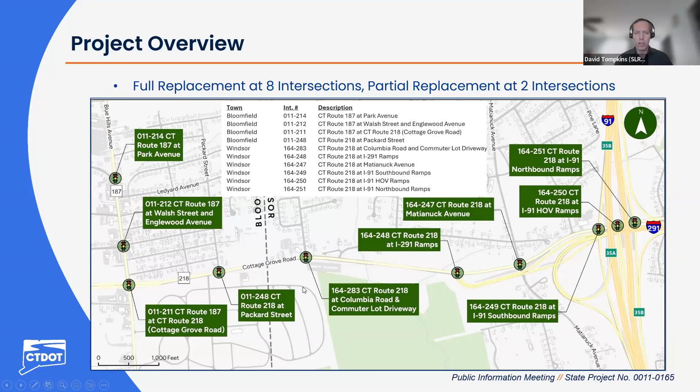The purpose of this project is to replace older infrastructure, which is more expensive and difficult to maintain. When we're done, the traffic signals will all be in good condition, new, and much easier to keep in a state of good repair. We are also going to make improvements to improve the efficiency of travel in this area and make some safety improvements at these intersections.

We're going to include much more push buttons and signals for pedestrians to cross at these intersections. We're going to look into flashing left turn yellow arrow signals, and upgrade by providing new detection and fiber optic communications connecting the intersections. We're also going to coordinate with the needs of the transit stops in the area, make sure sidewalks are in good condition, and increase illumination levels at the crosswalks and transit stops.

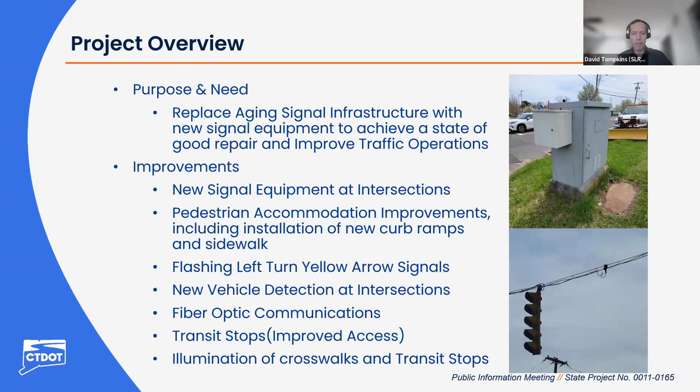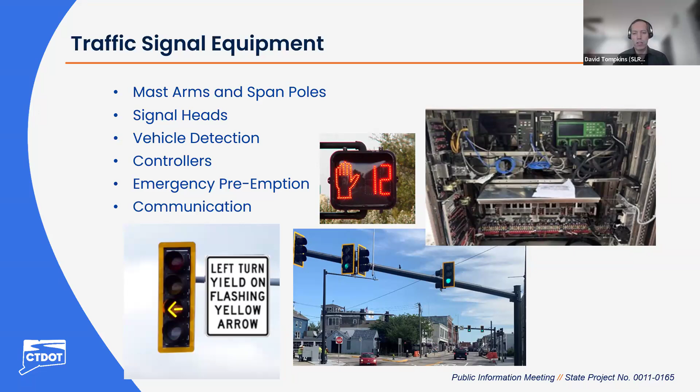So the new equipment will mostly be mast arms, as you see in this bottom center picture, and they will be over the roadway, rigid. It's better for the detection equipment to be rigid there over the roadway, works better. We're also going to look at the signal heads, considering if left turn flashing arrow signal heads were appropriate, and adding pedestrian countdown signals and replacing all the hardware that runs these traffic lights. We'll coordinate with the town on the emergency preemption needs they feel are necessary at these intersections.

For the pedestrians, we're going to upgrade to have new sidewalk ramps and sidewalk connections to the equipment as needed, new push buttons and signal heads with countdown signal timings for the clearance phase. The vehicle movements that will be concurrent with the pedestrian movements is another change. Instead of having pedestrians go when all traffic is stopped, we're moving to the current standard, which is concurrent pedestrian phasing, where traffic going northbound and southbound is going, and pedestrians can cross northbound and southbound at the same time.

To support this concurrent pedestrian phasing, there will be new signs. As you see there, the no turn on red and the turning vehicles yield to pedestrians signs will normally be blank, and then when a pedestrian phase is called, they'll display that indication to warn motorists of the pedestrians crossing.

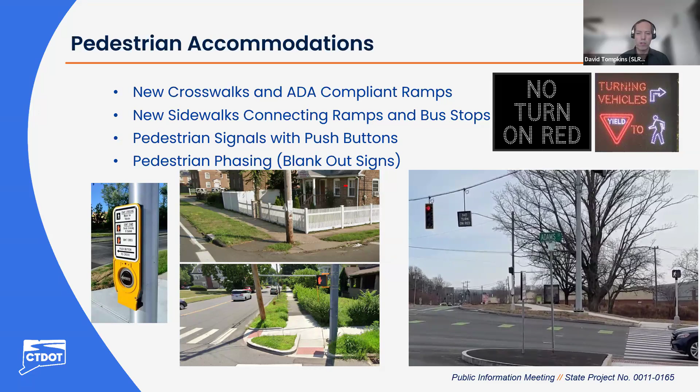I'd like to turn it over to Tom Daley to talk more about the technology here for the detection. Great, thank you, David.

As part of the project, we'll be providing some traffic signal operation improvements. These will include 360-degree bell cameras used for stop bar detection for all the approaches, to detect the presence of vehicles waiting at the stop bar as a trigger to switch the cycle from red to green. Additionally, radar detectors will be introduced for advanced detection of approaching vehicles along Routes 187 and 218. These detect vehicles several hundred feet in advance of the intersection and extend the signal green time to allow the approaching vehicles time to clear the intersection.

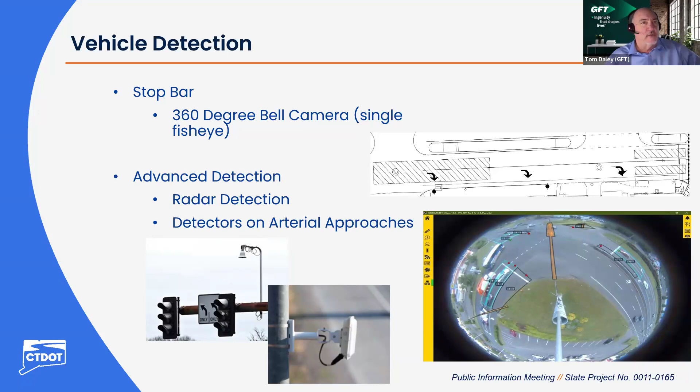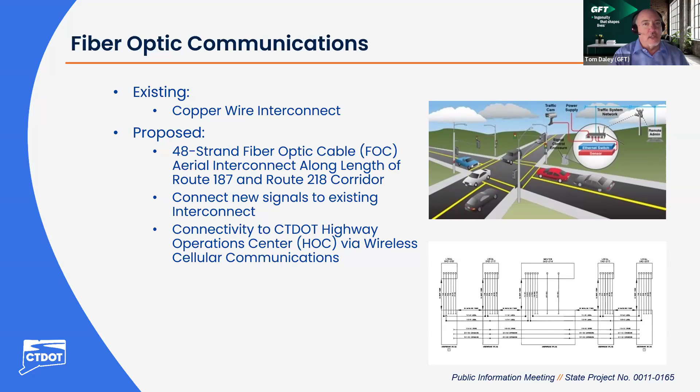To help improve corridor performance and mobility, fiber optic communications will be installed to replace the existing copper wire system. The fiber optic cable will run the entire length of the project corridors and connect to each of the traffic signals, allowing for communications and coordination between intersections. A master signal controller will include a wireless cellular system that communicates to the DOT operations center, allowing for more reliable communications and improving the DOT's ability to respond to operational issues and traffic incidents along the corridor. And with that, I'll turn it back to David.

Thank you, Tom. Now we're going to look at the individual intersections, starting with the northernmost intersection, Route 187 at Park Avenue, intersection 11-214 in Bloomfield. It's a fairly well-traveled Y intersection. You can see from the pictures on the left, a view looking south at the intersection, and the second lower picture looking north on Route 187. In the aerial view, you can see there's a barber shop on the corner and an auto supply store across the street. It currently has two crosswalks.

This is the pedestrian phase where all traffic is stopped and then pedestrians go. This will be upgraded to the new concurrent phasing to increase operations, efficiency, and safety here. We're going to include three crosswalks with replaced sidewalks at the corners to make them ADA compliant, and we'll use mast arm signal supports at this intersection. There will be a small area of right-of-way acquisition for the installation of these mast arms, and the signal heads will all be on the mast arm supports.

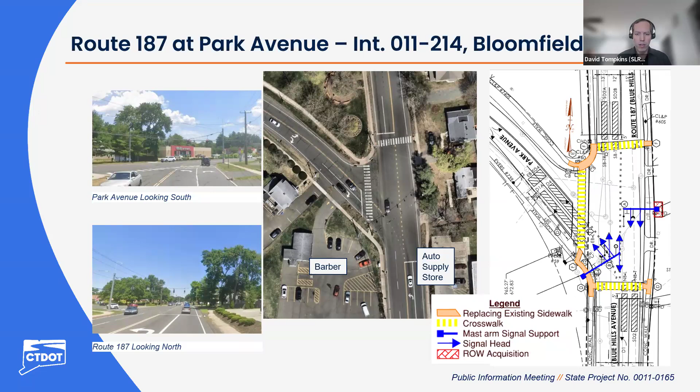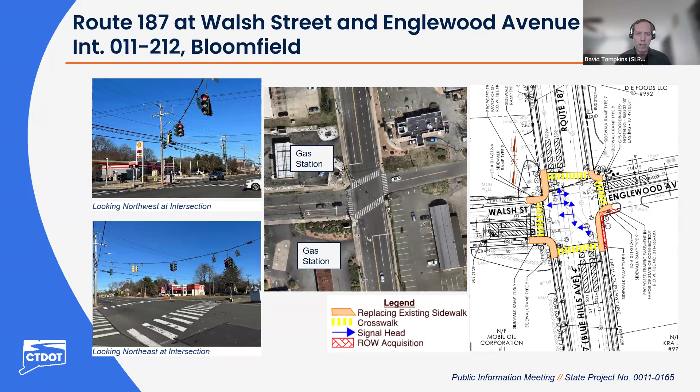Okay, this is the second intersection that will only be an upgrade, not a complete replacement. The upgrades will include new sidewalks, replacing the existing ones to make them ADA compliant, making the ramps more perpendicular, and making the sidewalk surfaces smoother and ADA compliant. The signal heads will all be replaced, possibly with what's there now, or we might look into some flashing yellow arrow options.

You can see where the sidewalk is being expanded a little bit, shown with a darker orange color. The phasing is going to change for pedestrians to concurrent phasing rather than exclusive phasing where all traffic stopped. This is to increase efficiency so that traffic will flow much better at this intersection after the changeover from exclusive to concurrent pedestrian phasing.

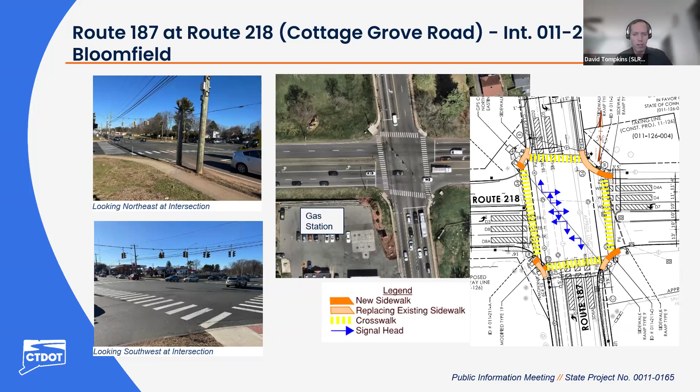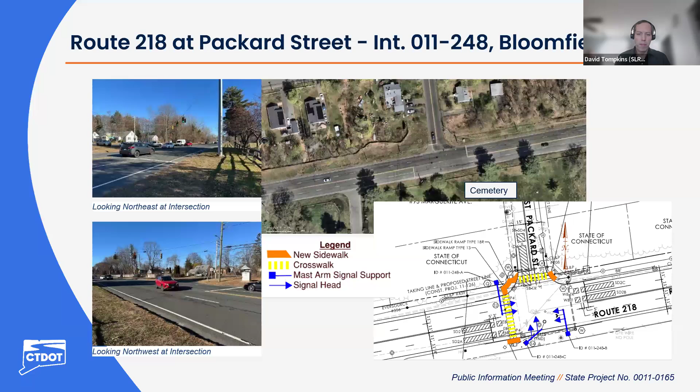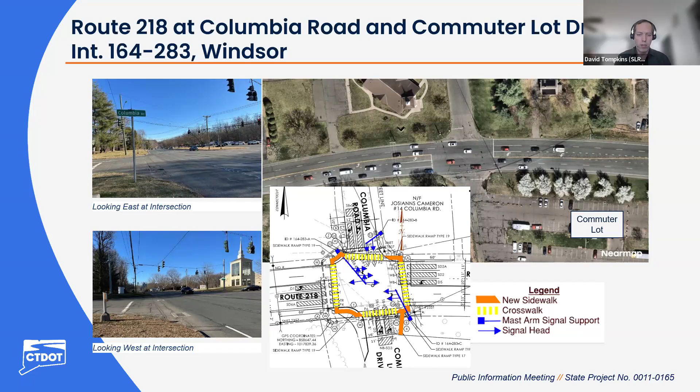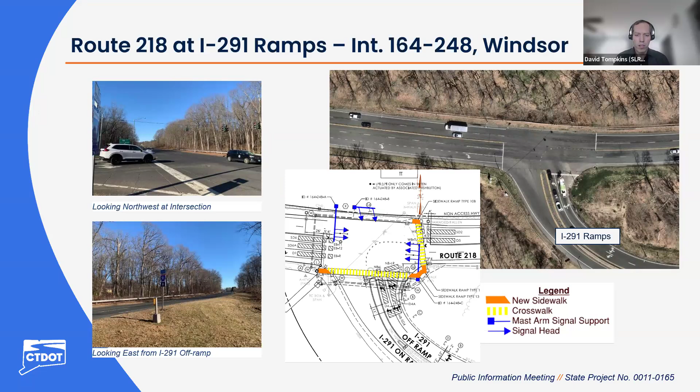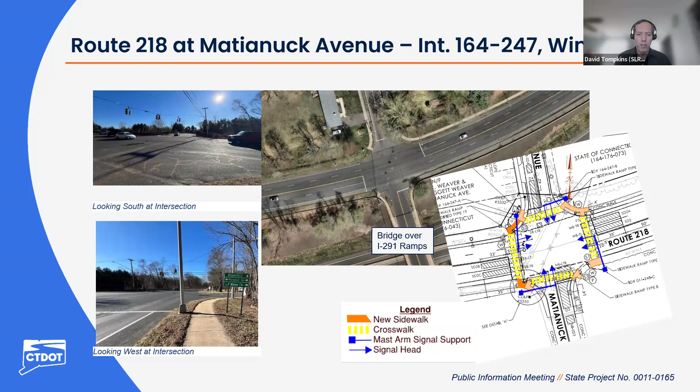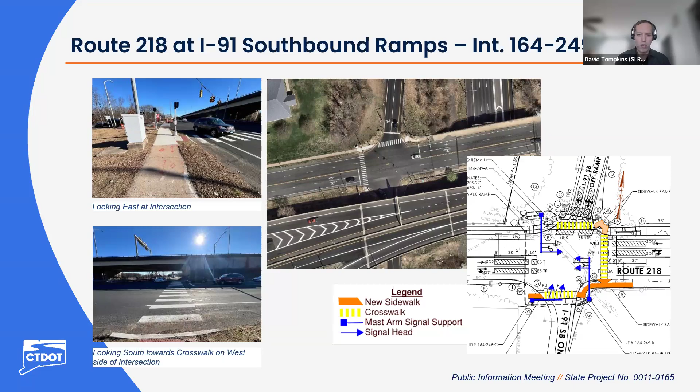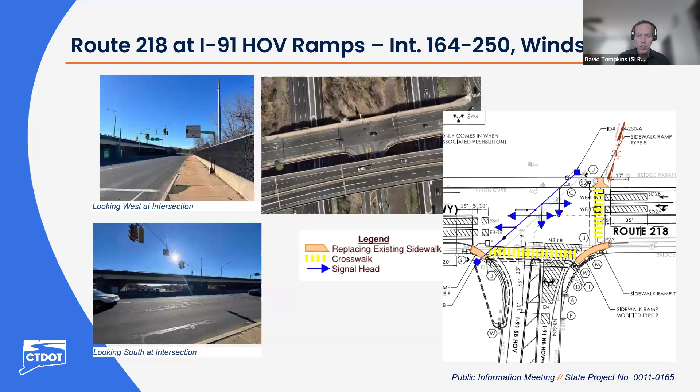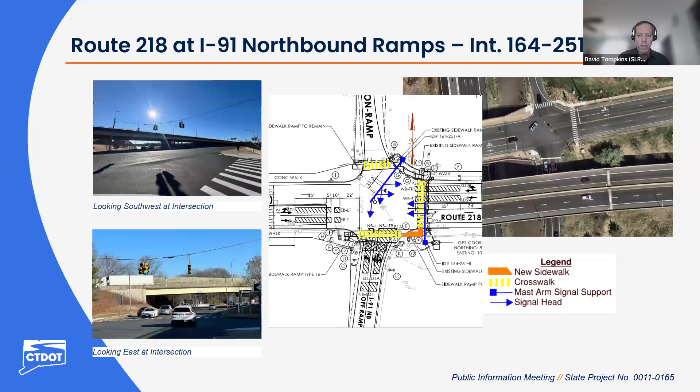So far, the project coordination has included a meeting with the town, and the town notification letter was sent out March 13th. Today is the virtual public information meeting, and we will have field meetings with town representatives from Bloomfield and Windsor. We'll also meet with the utility companies to coordinate what needs to be done to install these signals, both in the field and in the office.

The right-of-way acquisition process begins once the project design has progressed to a development milestone and all impacts have been determined. At this point, each affected property owner will receive from our office a formal letter of intent to acquire, or our initial letter, along with a property map depicting the specific property rights being acquired.

Next, our office will determine the fair market value of those property rights, which will be used to establish an offer of just compensation. That offer will be sent to the property owner in writing, and a rights-of-way agent will be available to meet with the property owner to explain the project and go over the specific impacts to their property and the department's offer.

The property owner will then have a reasonable amount of time to consider the department's offer and enter negotiations. When an agreement is reached, the department will prepare all necessary paperwork to record the deed and property map on the town land records.

However, if an agreement cannot be reached, in order to keep the project on schedule, the department will acquire the necessary property rights through its power of eminent domain. In that event, the state files a notice of condemnation in the Superior Court along with a monetary deposit in the amount of the department's initial offer.

The affected property owner would then have 6 months from that date to file an appeal if they felt the department's offer was inadequate. Whether or not the property owner chooses to appeal, the money deposited in the court is available to be withdrawn by the owner. It's important to note the department only acquires property rights that are needed for the project.

If there are any questions regarding the right-of-way acquisition process, I can answer them after the presentation. And with that, I'll hand it back to David. Thank you very much.

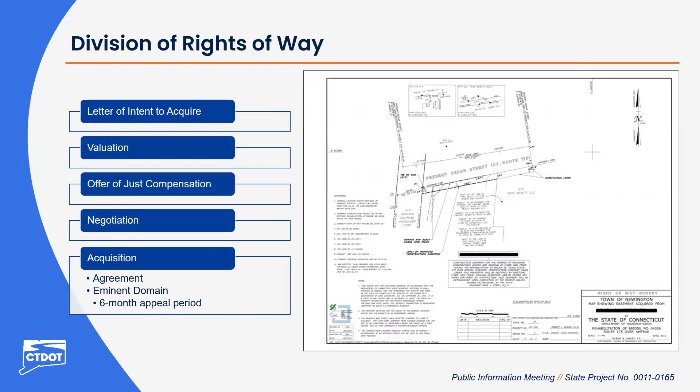Thank you, Jack. This project will be changing. For the cost, it was 100% state funding, and that'll be changing to 80% federal funding and 20% state. Right now, the budget is set at 10 million. It might come in slightly lower than that. We're still in preliminary design phase, so we'll have to adjust that as the design goes on.

We are going into the semifinal design phase of this project, and the design of the project will be completed in June of 2027. It will be advertised in September of 2027 with an expected construction start in the spring of 2028.

So for now, the next steps are to advance the design. We will incorporate the comments and feedback we receive from the public, and we'll continue to advance the design further, identifying any right-of-way needs and coordinating with any public transit or utility companies that need to be coordinated with.

And I think I'll turn it back over to John.